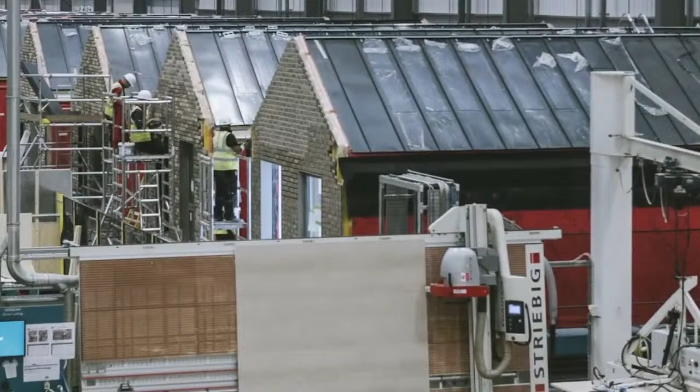At the Proctor Group, we've collaborated with modular and offsite companies for many years. Whilst we've encountered challenges alongside our customers, we have also witnessed numerous successes within the sector. We aim to showcase success stories from the offsite sector and emphasise how customers have effectively navigated and overcome recurring modular design challenges.

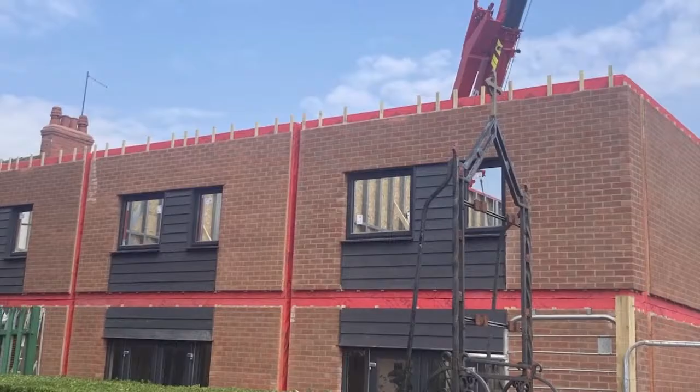With growing demand and government targets for new construction increasingly conflicting with shortages of the skilled labour necessary for delivery, moving construction off-site can offer a compelling solution.

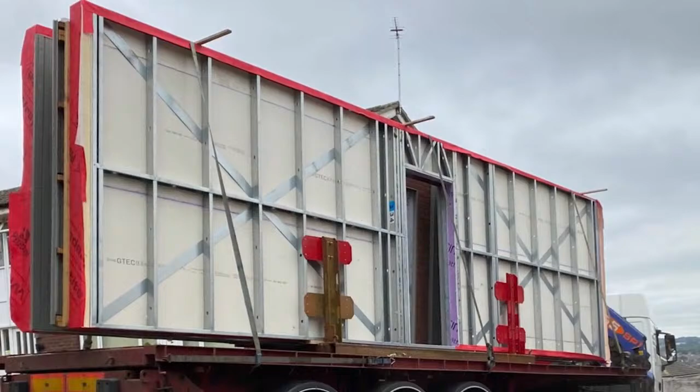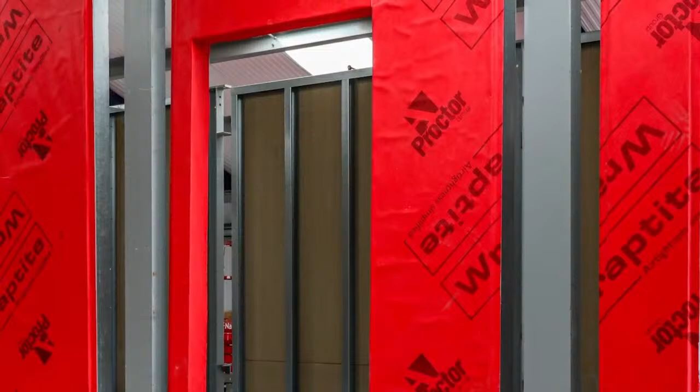Whilst there will always be a place for highly skilled trades, factory-based production techniques can have a significant impact on efficiency, speed of construction, and simplifying a move to the closer manufacturing tolerances required to deliver cutting-edge building envelope performance.

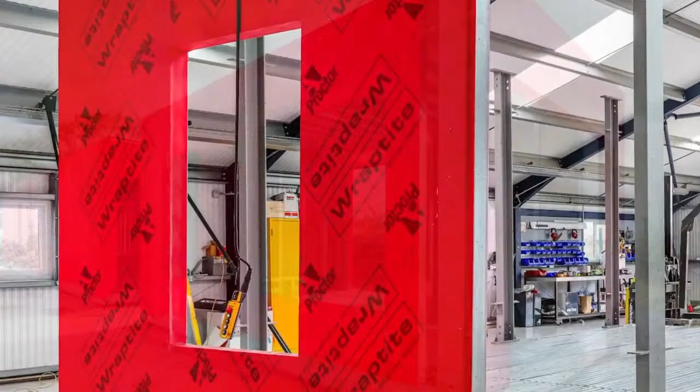With the construction industry facing the challenges of skills shortage, could the modular and off-site sector be the solution? Through the integration of modern technology and the advantages of better factory environments, modular construction offers a compelling alternative to the cold and wet conditions of traditional site work.

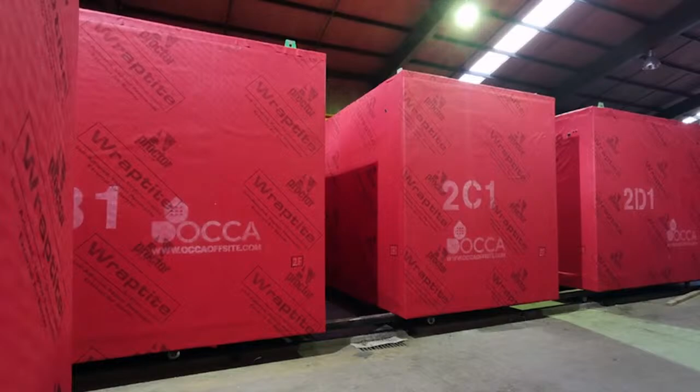This mix of efficiency and quality is made possible by the principle of design for manufacturing and assembly, or DFMA. This is an approach based on high-volume manufacturing techniques utilised across a wide range of industries.

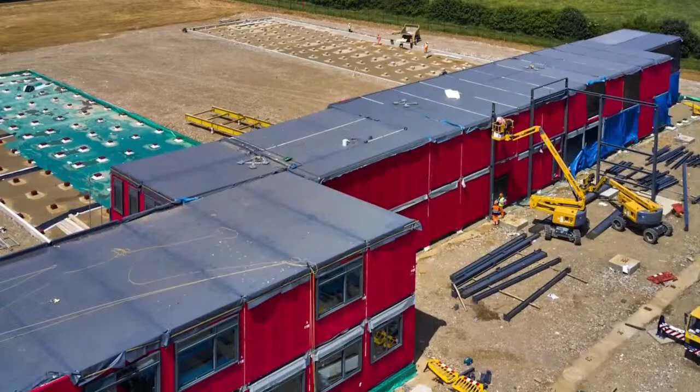The key to this approach is simplifying and streamlining the design of a building, considering the actual process of fabrication. This helps to ensure the designer's goals and requirements are met, not by strictly enforcing complex specifications through micromanagement, but rather by designing out opportunities for problems to arise. Put simply, there's no way to cut corners if the path is a straight line.

In this context, the consistent performance offered by construction membranes and the factory-based assembly typical of modular construction can be combined to produce highly effective and optimised results in 5 key areas.

Firstly, by facilitating standardisation and repeatability of manufacture, where membranes can be easily applied to modules and panels in a factory setting with standardised detailing for joints, openings and service penetrations. Such a simplified design greatly increases the ease of assembly, with the need for complex installation and detailing on site greatly reduced. The controlled environment of a factory also reduces the potential for weather-related delays or problems.

The ability to integrate installation of services and building systems also facilitates better integration of services into the design and installation process. This reduces the need for skilled labour on site and the potential for rework or correction of problems.

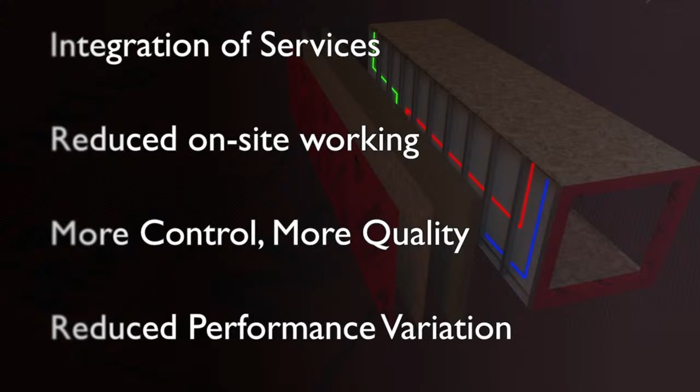The net result of this simplified and optimised process is higher construction quality and less variation in the as-built and as-designed performance of the building envelope. This in turn means tighter tolerance and better efficiency targets can be adopted throughout the process, while still ensuring compliance with regulations and quality targets.

Quality can be significantly enhanced with off-site construction. Each process of the manufacturing line can be meticulously documented, making it easier for warranty providers and construction inspectors to review. Inspections within a factory setting are more straightforward, as every process is visible and controlled, compared to the complexities of walking around a traditional building site with numerous homes.

This integrated and optimised construction process fits well with the similarly holistic design principles outlined in the latest edition of the BS 5250 Code of Practice for Moisture Control in Buildings.

First introduced in 1975, BS 5250 originally focused on condensation in buildings. However, since then it's become more widely recognised that a more wide-ranging approach to dealing with moisture control is beneficial.

This approach was outlined in detail in the 2017 BSI White Paper, Moisture in Buildings: An Integrated Approach to Risk Assessment and Guidance. This approach was formalised in the 2021 edition of BS 5250, which both emphasises the need to develop a full understanding of the range of moisture risks present in the building envelope and outlines the key tools and strategies required to implement this.

Developing this holistic approach to managing heat, air and moisture, and using construction membranes to optimise performance, is a key part of what we do here at the Proctor Group. We've long recognised the importance of a well-considered and integrated approach. To fully understand how to best manage these factors, there are three key high-level design factors we need to address: the building, the weather and the occupancy.

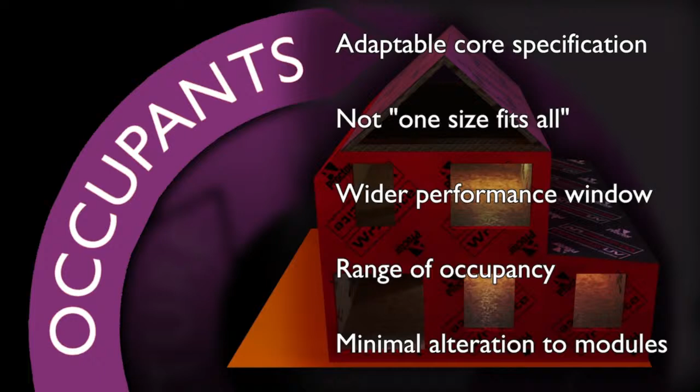Whilst a one-size-fits-all approach is rarely a good strategy, with careful consideration the performance window can be widened and optimised to fit a broad range of occupancy patterns without significant alterations to the specification.

Much like the occupancy of the building determines the internal environment conditions and resultant moisture risks, the weather determines those conditions and risks externally. As with internal conditions, an appreciation of the variety of conditions that must be allowed for is important. For example, the Passive House Planning Package divides the UK into 22 different climate zones, reflecting the variations in temperature, humidity, rainfall and wind speeds that can be expected even across a relatively small distance.

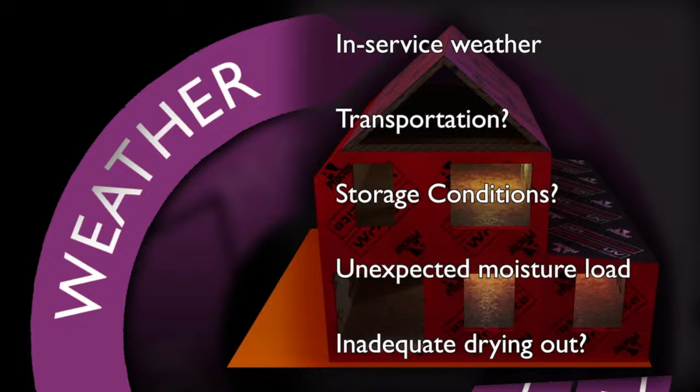As well as the weather during service, it's also critically important to consider weather during transportation and storage of modules, panels and other materials. If weather during storage contributes to the moisture load significantly, it can be difficult for this additional moisture to dry out if not anticipated and accounted for at the design stage.

Once we have a good appreciation of the internal and external environments, it's possible to begin to design the fabric of the building to work within these parameters. Once again, we need to understand the interactions between materials and their purposes to ensure the design is properly optimised.

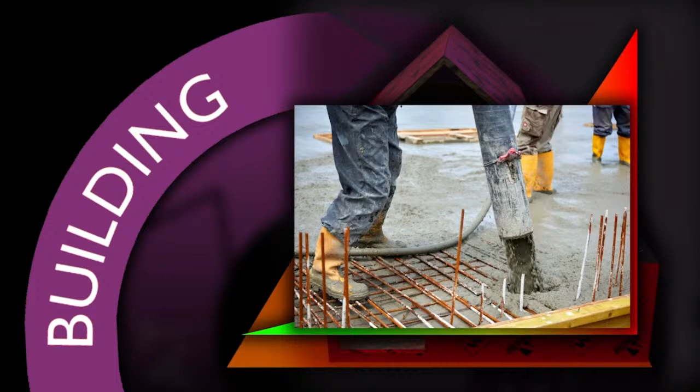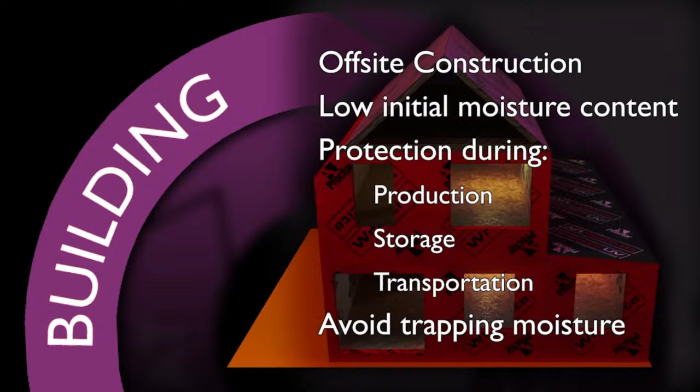Concrete and masonry buildings typically have higher internal moisture loads than timber frame, as there's more wet trades to dry out. But if not stored correctly, a timber frame can absorb significantly more moisture than may have been anticipated. For off-site construction, which in theory has very low initial moisture loading due to factory production, this can be an important consideration. If modules or panels become wet at any point during production, storage or transportation, this should be accounted for.

As the fabric may not be capable of allowing the elevated moisture content to dry sufficiently quickly to prevent problems arising. Such problems can be exacerbated by non-permeable protective measures such as shrink wrapping, which will trap any moisture present. Whilst this might not seem like a big problem, if materials are stored for a long period of time, this trapped moisture can lead to mould growth in the stored materials.

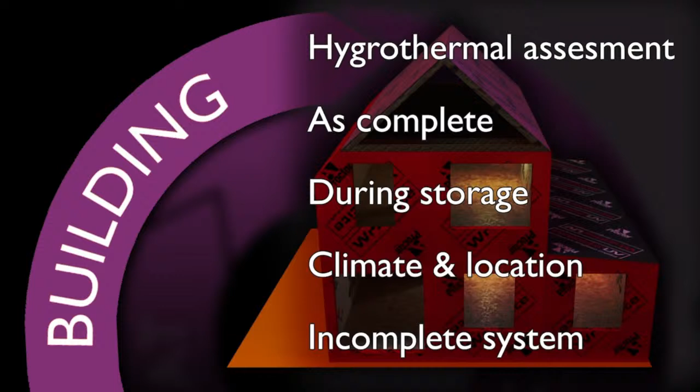In our experience, most modular design challenges arise during the storage and transportation stages. At the Proctor Group, we conduct hygrothermal assessments, not only on the finished building, but also on the modules in their storage state. This is crucial because modules in storage may be in a completely different climate zone compared to the site location, or they may not yet include the complete build, such as external insulation or cladding systems that are yet to be added.

From these high-level factors, we can then begin to break our assessment down into the low-level interactions between heat, air and moisture, and we'll now move on to consider how we can assess, model and test these, both at the design stage and on-site.

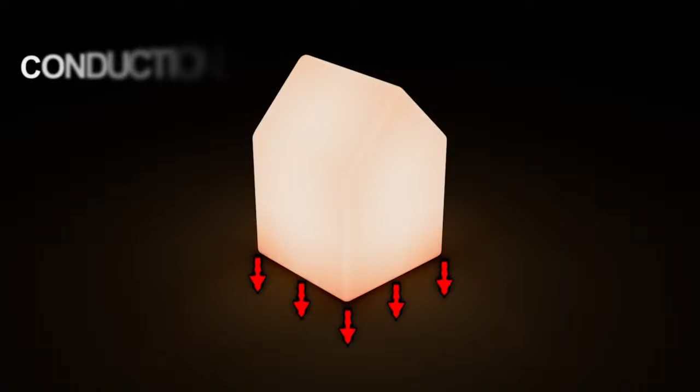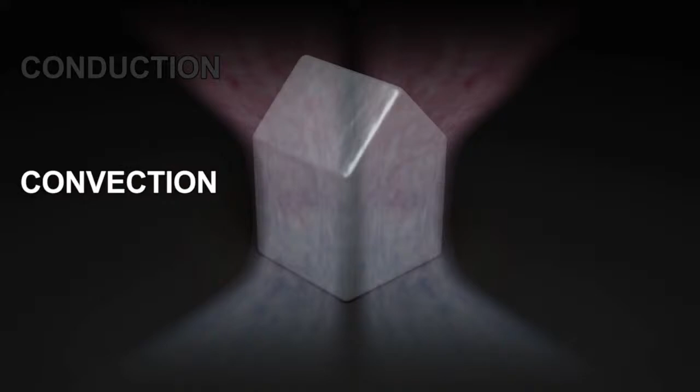Heat flows through the building fabric in three main ways. The first, conduction, occurs via direct physical contact between materials, and this is what insulation materials typically reduce. The second, convection, occurs through a fluid medium, in this case usually air, moving around the building. Gaps, cracks and other imperfections can allow air movement to transport heat out of the building, bypassing the insulation layers. The third, radiation, transfers heat directly through infrared waves and requires neither contact nor a fluid to transfer heat. This type of heat loss is reduced by using reflective foil membranes and insulation facings.

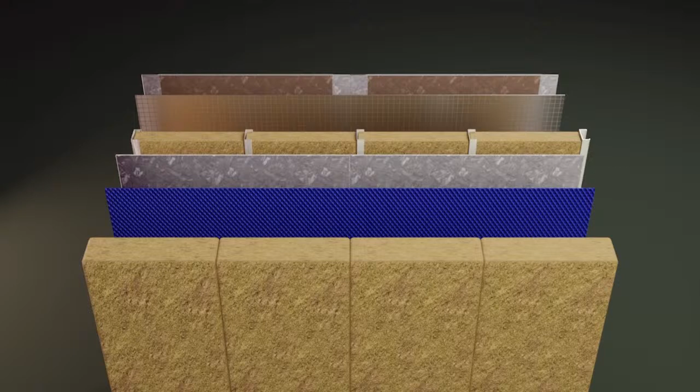We can calculate how much energy is lost by conduction and radiation using U values, which is a measure of how fast heat flows out of the construction. To determine this value, we first look at the thermal conductivity, or lambda value, of the insulation. This shows how well a material transfers heat and does not vary with thickness, which makes it a good way of comparing how well materials work as insulation.

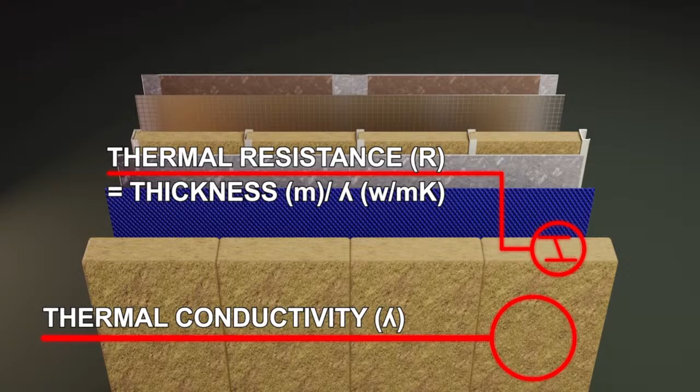If we divide the thickness of the insulation layer by this value, this gives us the thermal resistance, which is how well the material restricts the passage of heat.

To arrive at the U value, we can then add together the thermal resistance of each layer in the construction and take the inverse of that value.

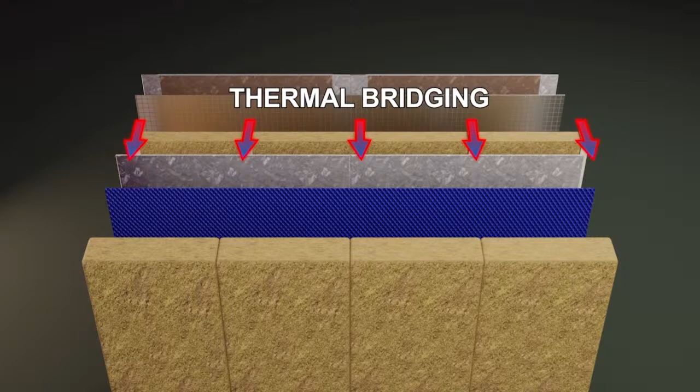Finally, we must apply corrections to account for areas where the insulation is intersected by fixings or structural members. This is called thermal bridging and can arise, for example, when a metal stud which conducts heat well passes through a layer of insulation.

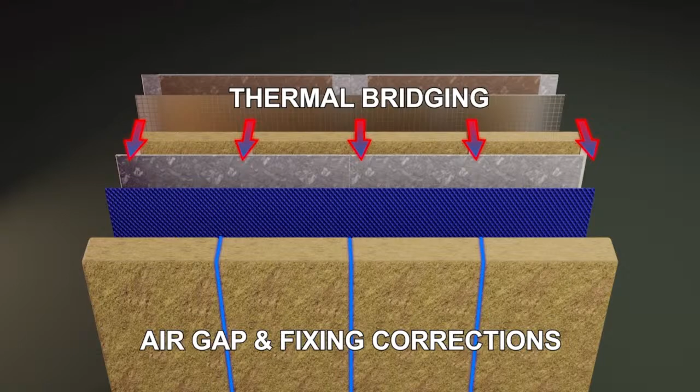Corrections are also applied for fixings and for any air gaps that may be present. We need to account for these air gaps, as this is one way to determine the effect of convection on the overall heat loss. Another important component of convective heat loss comes from the wind acting on the building, with cold air pushed into the building on the windward side, called infiltration.

Conversely, on the leeward side, the reduced pressure draws warm air outwards. A similar process occurs with warm internal air rising upwards through the building, drawing colder air into the heated spaces.

Both sources of heat loss can be reduced by the installation of an airtight layer in the building, with air barrier membranes being the most common way to achieve this.

The degree to which this air movement affects energy performance depends on the flow rate. In the UK, this is typically expressed in cubic metres of air movement per square metre of envelope area per hour at a pressure of 50 pascals.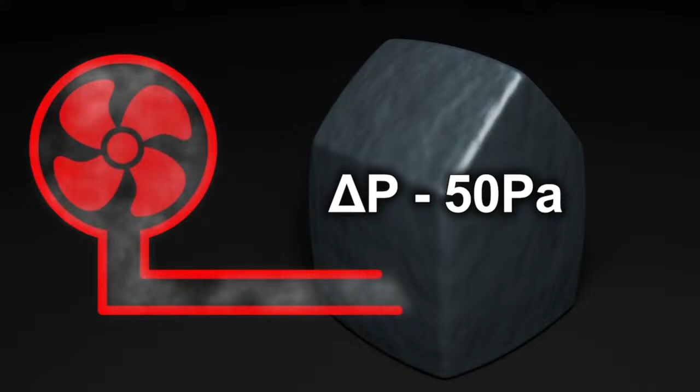This value is used in energy performance calculations to determine the energy input required to overcome these losses. To verify the value used in the calculations is correct, buildings are pressure tested by either pushing air in or drawing air out to achieve the 50 pascal pressure difference between inside and out.

The building regulations specify a backstop value which varies across the UK regulations, but is typically around 7 to 8 metres cubed per square metre per hour.

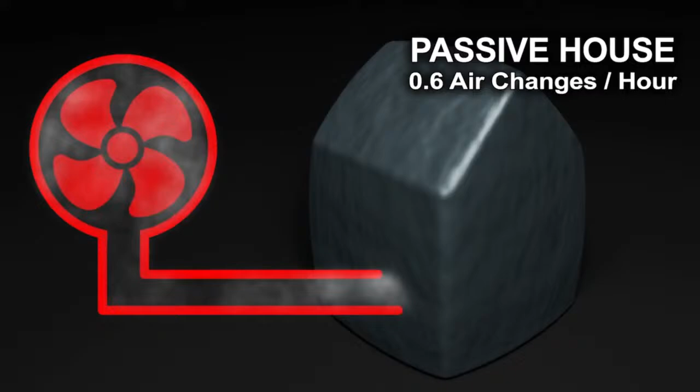The passive house standard is considerably tougher to meet, at less than 0.6 air changes per hour, which is roughly equivalent to the gap the size of a 5-pence piece for every 5 metres of floor area.

Improving overall heat loss in any design is crucial, but it's especially important in modular construction. In this sector, wall thicknesses play a critical role in costings, transportation, and performance. Optimizing wall thickness can lead to better thermal efficiency, reduced costs, simplified transportation, and enhanced overall performance of the modular units.

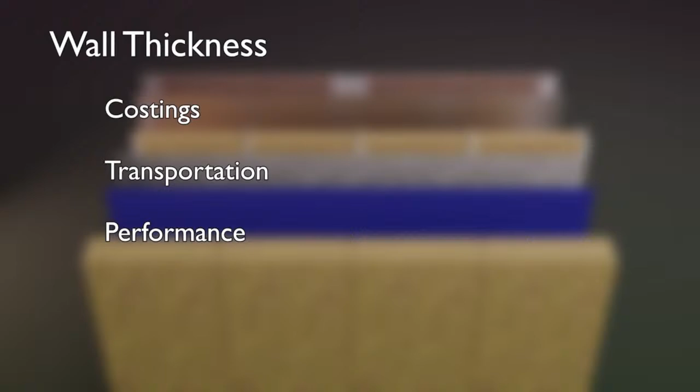Both the U values and the air leakage rate are used to calculate the overall heat loss, and hence CO2 emissions, so it's possible to look at how these two factors interrelate.

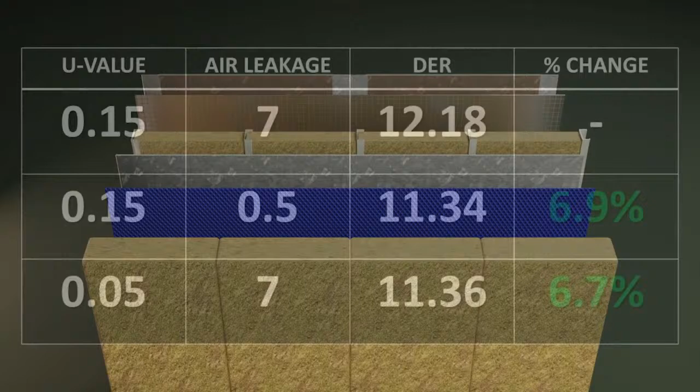Using a simplified example, we can see that achieving a performance uplift of just under 7% requires the wall U values to go down from 0.15 to 0.05, or the air leakage rate to reduce from 7 to 0.5.

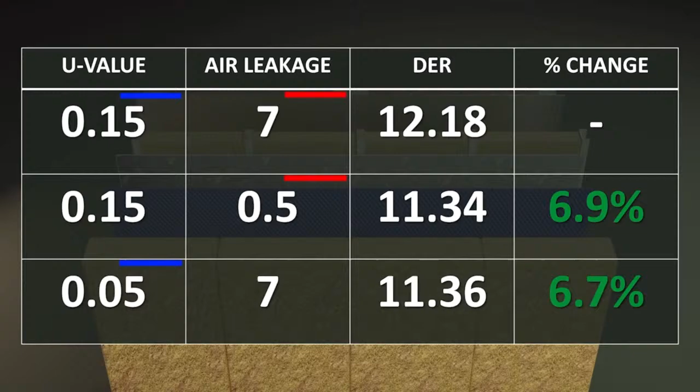But what do these solutions look like in practice? Our base wall with a 0.15 U value would look something like this: a 95mm SFS wall with an infill of mineral fibre and a further 175mm of fibre externally.

This type of construction will typically achieve an air leakage rate of around 7 with no special measures taken.

To get this down to a U value of 0.05, we would need to increase the thickness of the external insulation layer to 630mm, which is obviously not practical. This is because U values are not linear, so as the U value decreases, insulation becomes exponentially thicker.

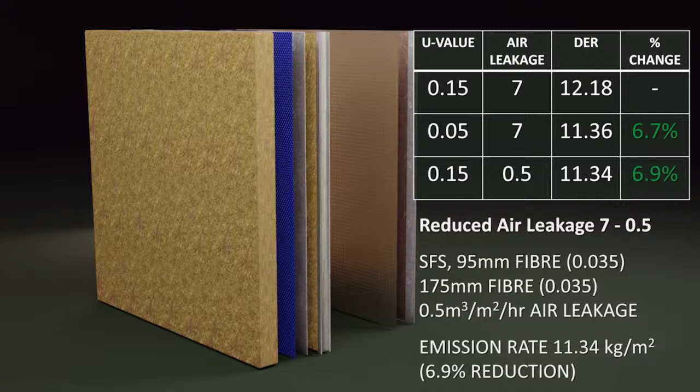If we instead reduce the air leakage rate, this doesn't add any thickness, but requires a more careful approach to the air barrier layer. If this was done using an air and vapour control layer, an AVCL, internally, this would require careful sealing of all laps and joints and of all service penetrations and runs.

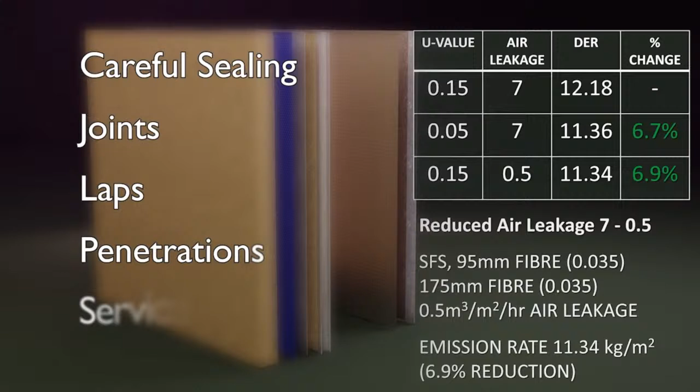Whilst this is by no means impossible, particularly in a factory setting, it does require a degree of additional time and skill to achieve this, and is susceptible to damage should any follow-on work on site be required.

If we move to using a self-adhered air barrier like Wraptite, the air barrier moves to the external side of the panel, away from most of the services and potential penetrations.

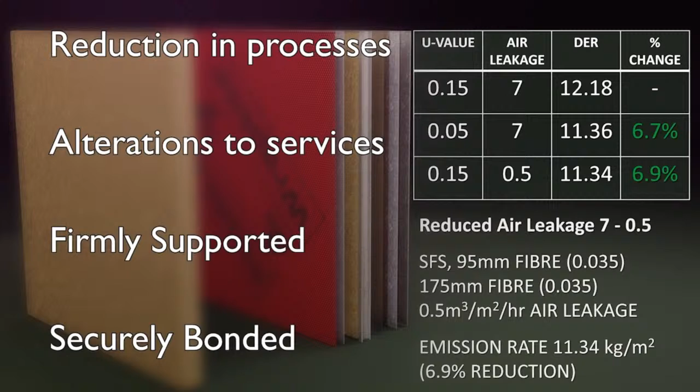As well as requiring less sealing in the factory, this configuration also means any adjustments or alterations to the services, either during construction or throughout the lifetime of the building, can be made with less risk of damage to the airtight layer. A fully self-adhesive membrane also means the air barrier is firmly supported by the substrate, making it more durable during transportation and temporary exposure.

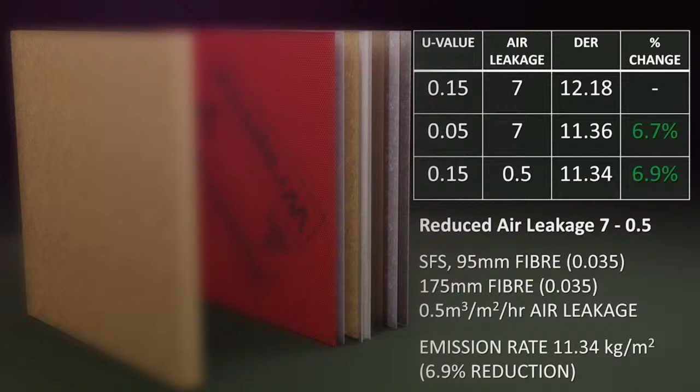Wraptite uses a vapour-permeable adhesive, which provides a secure and permanent bond once fully cured, but which allows for repositioning during the installation itself. This helps ensure a high-quality installation with no gaps or wrinkles.

Because the full surface of the membrane is adhesive, this provides a greater area for adhesion. This will result in a stronger bond which is more resistant to any surface defects or contamination when compared to a tape joint which has a much smaller bonding area.

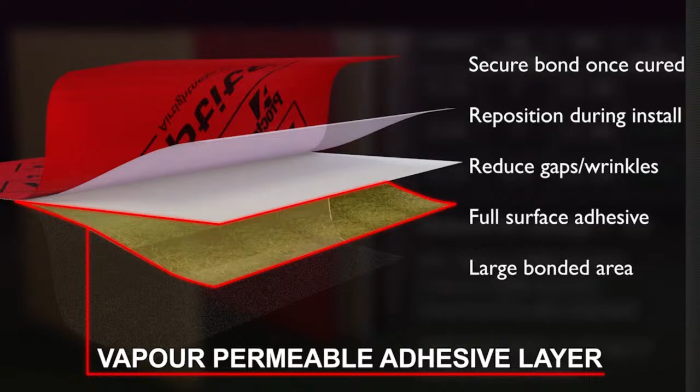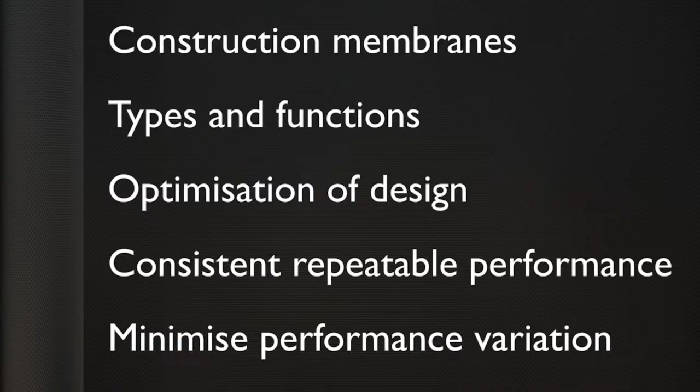The use of an external air barrier is just one of the situations where construction membranes are useful in optimizing the design of an element. By introducing reliable and repeatable performance, properly installed membranes can help ensure the variation between design calculation and on-site performance is minimized. We supply a range of membranes with varying performance characteristics, so it's important to know which material is used where within the construction.

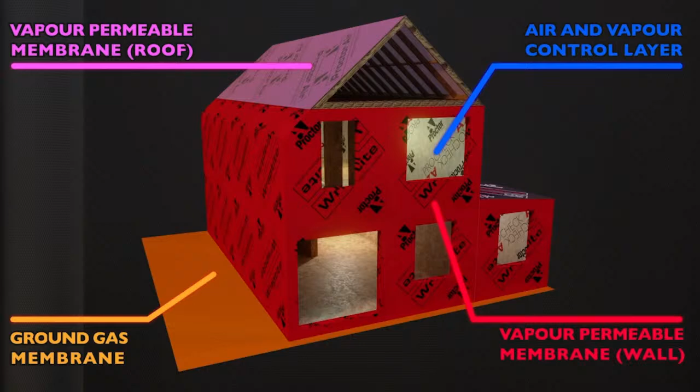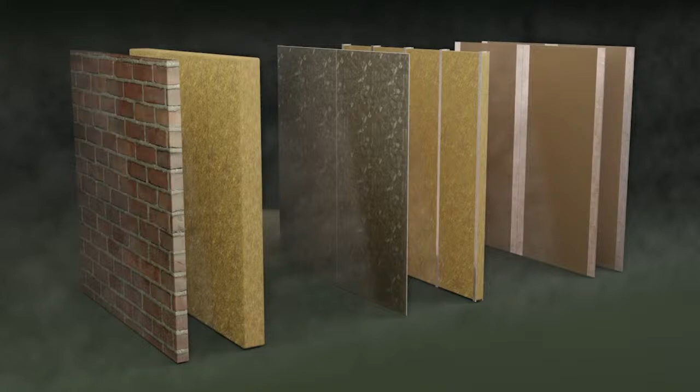For this, we use a condensation risk analysis calculation to model the movement of moisture through the construction. This type of calculation uses the properties of the materials in a construction and the internal and external environment conditions to first work out the temperature gradient throughout the structure, then to work out the point at which moisture vapor will condense back into liquid water, known as the dew point.

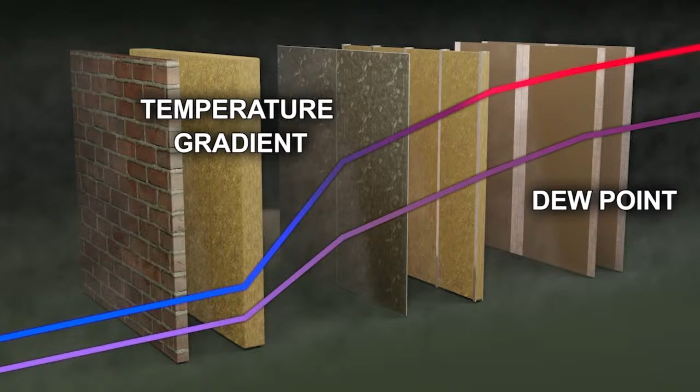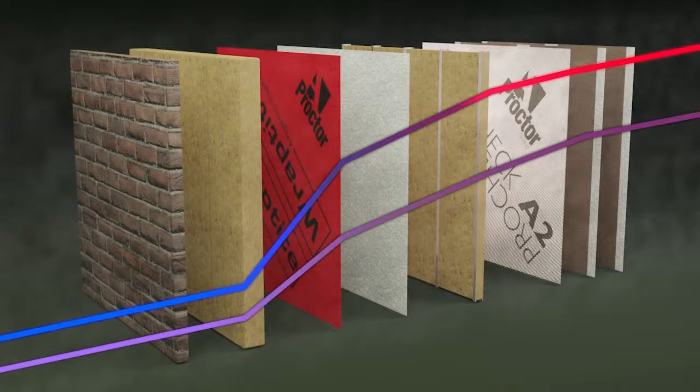If these lines coincide within the construction, there is a risk that moisture could accumulate and lead to damp and mold growth. By adding membranes to the construction, we can alter where the dew point occurs to ensure no risks are present whilst allowing the wall to breathe and moisture vapor to escape to the outside.

The first type of membrane is an air and vapor control layer, or AVCL, which is typically installed on the warm side of the insulation layer and is both air and vapor tight. The purpose of the AVCL is to limit the movement of moisture into the construction and also to reduce the air leakage rate, as we discussed earlier.

To ensure it provides an effective and continuous layer, it's important that AVCLs are not damaged, so a reinforced material is desirable. Matching the vapor resistance of the AVCL to the building purpose is an important consideration to balance the need for walls and roofs to breathe against minimizing the condensation risk present. The dew point calculation allows this to be optimized according to project requirements.

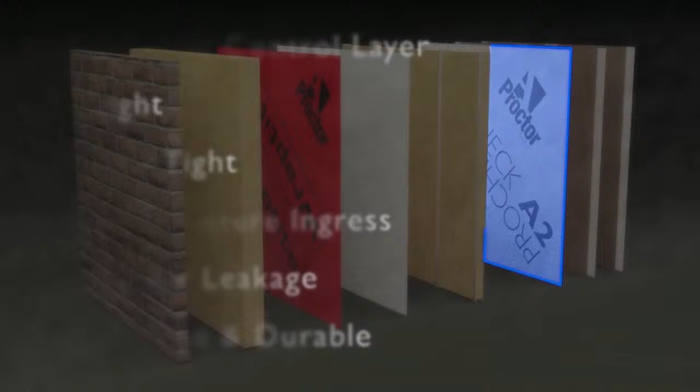The second type of membrane, the vapor permeable membrane, allows the passage of moisture vapor but not liquid water. Vapor permeable membranes can either be air open or air tight, depending on the project requirements and membrane location. Because they do not trap moisture, they can be placed either outside the insulation or between insulation layers as required.

If it's placed externally, it can also provide temporary weather protection during construction, while if placed over the sheathing board, it can protect the panels or modules during transportation. As with AVCLs, it's important to verify the right balance of permeability is maintained throughout the construction, and there are two main methods of calculating this.

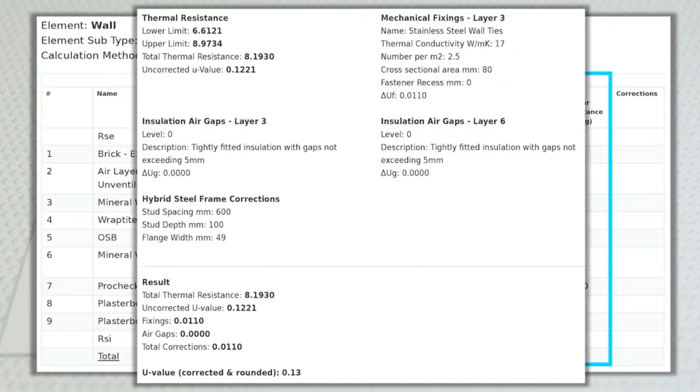The first of these, the Glaser method, as defined in BSEN ISO 13788, is a relatively simple means of modelling the flow of moisture in a steady-state condition, based on monthly averages of temperature and humidity. This straightforward method is sufficient to quickly assess most types of construction, and we have calculation software to provide this available on our website members area, along with U-value calculations.

It's important to note that this method has some limitations though. Firstly, it does not account for the moisture storage capacity of materials, which can allow condensation to be stored and released safely. Secondly, it assumes moisture moves in one direction only, whereas in reality, the varying environmental conditions over an annual cycle will move moisture inwards as well as outwards.

Finally, whilst it's possible to vary the preset temperature and humidity, it's not possible to model how these may vary over time, or to model performance over periods longer than a year. To fully and dynamically model these scenarios, the use of the BSEN 15026 method is more suitable. This provides a more complete analysis, but it is at the expense of requiring substantially more detailed and complex inputs.

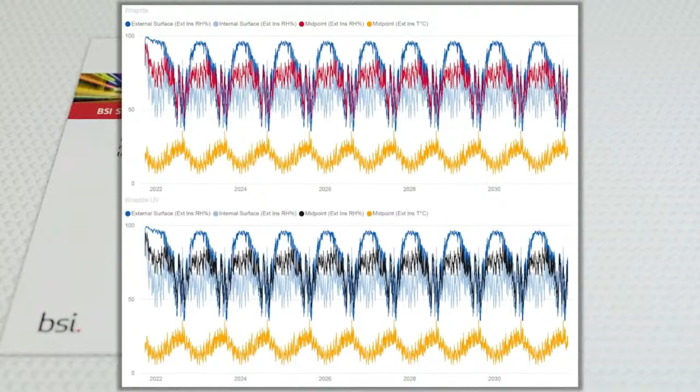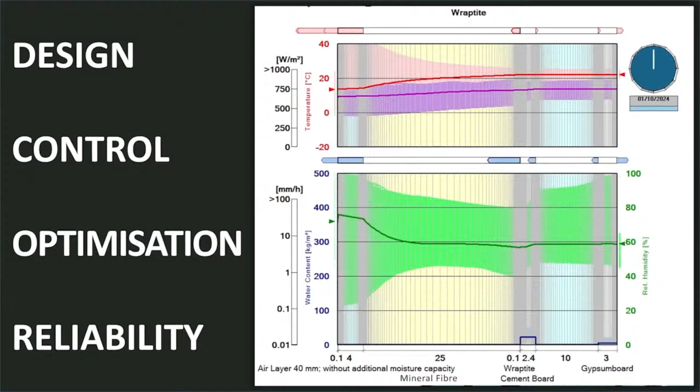For this reason, it tends to be limited to more unusual or complex scenarios, such as the recently completed St Sidwell's Point Leisure Centre, where detailed environmental modelling and optimisation was a key part of achieving Passive House certification. Taken together, these tools provide a range of options to ensure the design strategy is matched to the outcome required, and the materials used are well suited to their specific application.

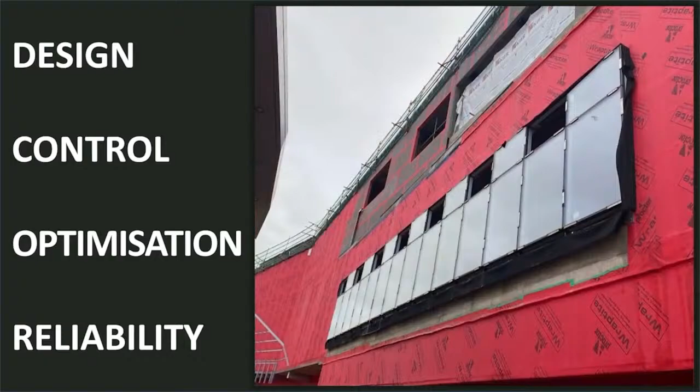In the case of a modular system, detailed analysis can confirm that a standardized construction can meet a broad range of application requirements. This process can also be used to develop a simplified range of configurations of panels and modules, each with a well-defined range of performance characteristics.

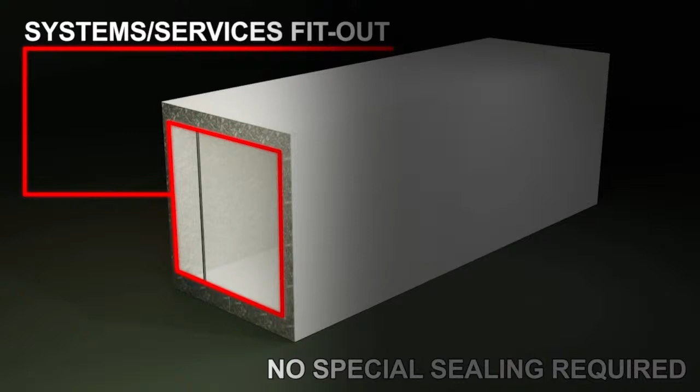Let's now look at how this approach can be applied to a modular system throughout the process. With the basic structure of the modules manufactured, building systems and services can be fitted out internally, with routing unaffected by any considerations around air barrier performance.

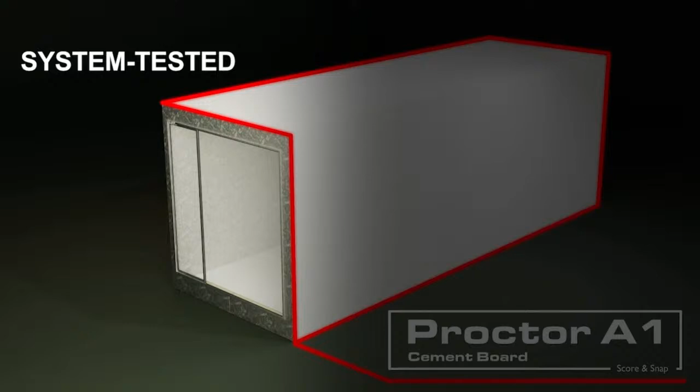An outer sheathing board such as our Proctor A1 cement board provides a solid substrate for the Wraptite air barrier membrane to adhere to. These materials have also been tested as a system to verify both fire spread and through-wall fire resistance performance. Not only that, but Proctor A1 cement board can be scored and snapped, significantly speeding up the installation process.

This method eliminates the need for ventilated cutting areas or mechanical saws, making it an ideal solution for a factory environment. Wraptite can then be used to wrap the entire module, providing a W1 rated weather-resistant layer, without compromising air leakage rates or the ability of the building to breathe.

This negates the need to shrink wrap the modules during storage and transportation, both removing a process, a cost, and a potential point of failure should the wrapping become damaged.

Depending on the required performance for the end use of the module, one of our range of vapor control membranes can be fitted internally if needed.

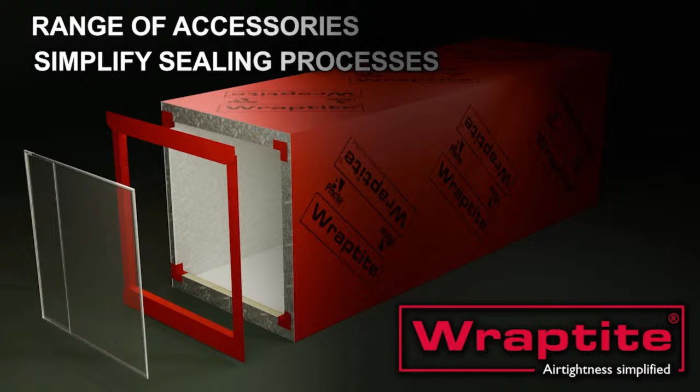We also supply a variety of accessories to accompany the Wraptite air barrier to simplify sealing at openings and other penetrations. The corner sections shown help ensure continuity of the air barrier around the windows, which can reduce the need for additional gaskets and seals.

There is also a Wraptite split liner tape for use at corners and panel junctions, again aimed to reduce complexity during installation, whether on-site or off.

This results in a weather-resistant module that can be transported and stored as needed, for final assembly on site. Any sealing of joints can then be done using Wraptite tape and the wind and watertight structure pressure tested immediately, meaning any remediation can be assessed at the earliest stage possible.

The final building can then be completed with the air barrier in place and tested. We can also supply the Wraptite UV membrane, which delivers all the benefits of Wraptite but with ultraviolet resistance for use with open-jointed cladding.

Similarly, while Wraptite can be used in warm pitched roof applications, we also have our Proctor air underlay membrane, which is both air and vapor permeable for optimal performance in cold roof build-ups.

That concludes today's webinar, and we'll now move on to the Q&A session.